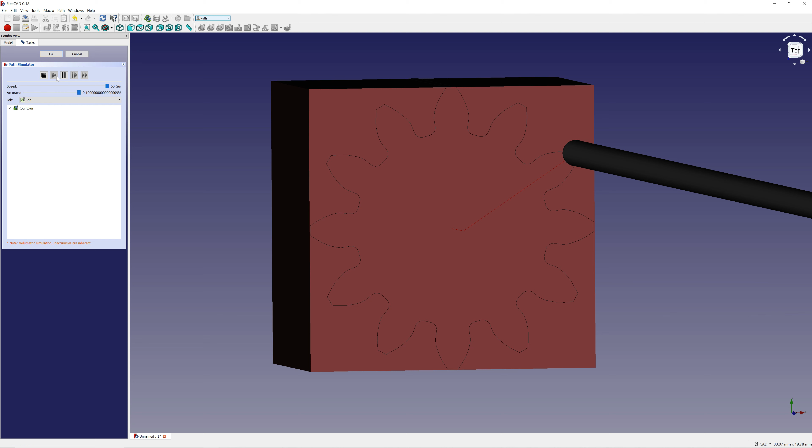Alright, so here's a review on how to do involute gears. With the million things I do at the same time, I keep forgetting how to do stuff on FreeCad. So here it is, just a quick review how to do involute gears, and this is basically what's gonna end up doing with step downs on the XY. Very boring. Also gonna do videos later with the robotics and a slitting saw on the 4th axis, but how about this for now?

So this is how I do it. Start fresh, discard. So file, new. We go parts design, with the motto create body, and then part design involute gear.

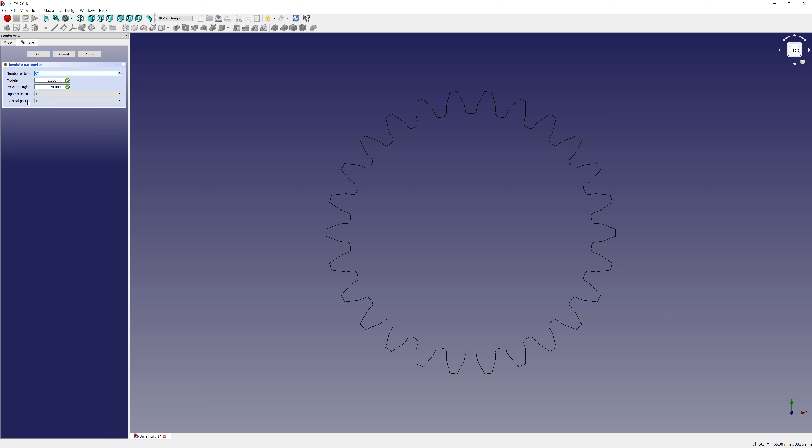I've been working my number of teeth. My gear has 12 teeth, with module 1 and pressure angle of 24. Okay, that's my gear. So let's speed this puppy up.

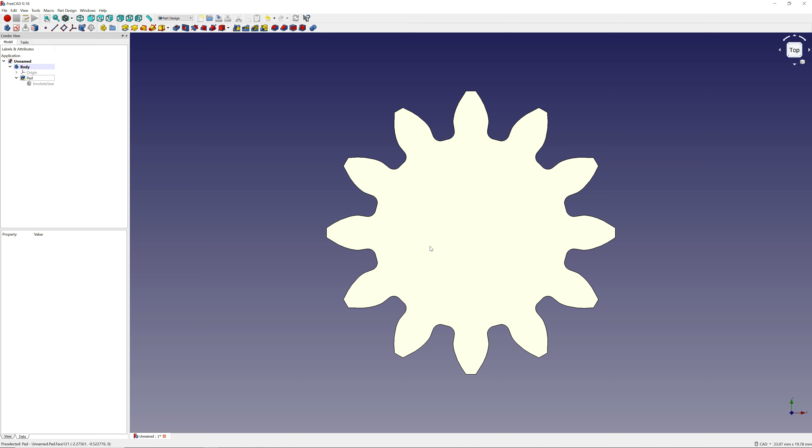10 millimeters. I work on the negative Z axis, so reversed 10. So now let me just make sure it looks good. It does. This is what I want. This, by the way, is for the Shasta pool cleaning system. It keeps breaking. I'm gonna do this out of plastic, and then if it works out, I'm gonna do it out of aluminum or bronze, depending what I have in my shop.

Path. So here, I guess you gotta click on this face. Start path. Not responding. On the body, so it's not on the face, it's on the body.

Let's go general, job, output, Linux CNC. This is some of the arguments I've been using. Precision equals 3 or 4. Let's do create cylinder. Already know that this is 7.02 with a height of 10 millimeters. I'll do all these other stuff here in just a second.

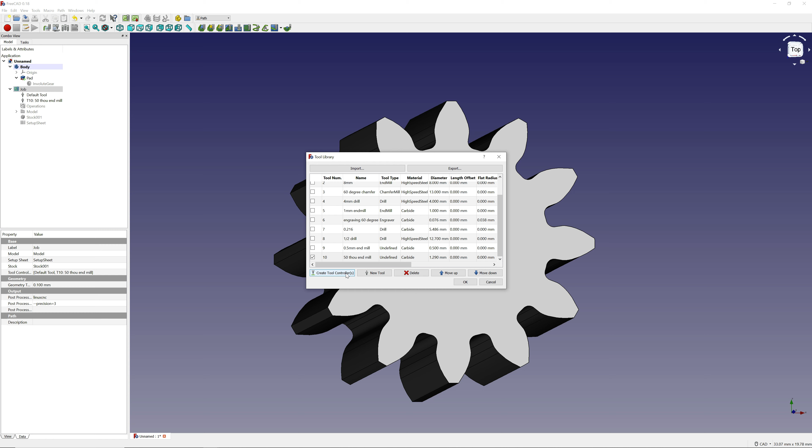So here's the job. Let's add the tool I've been working off. It's a half, or 50 thousandths of an inch endmill. Create tool. Okay, let's work on the tool.

30 millimeters a minute is about 1 inch per minute. 1650 is 100% of my VFD, and then I'll put 4200 on my Bridgeport. That looks good.

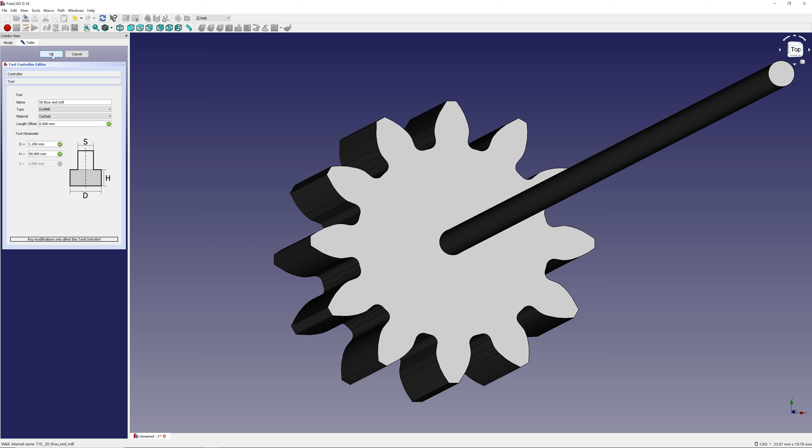And then I guess what I gotta do here is create the path around this puppy. Discard, discard, discard. I like to do start at 0. Final depth, like I said, I work on the negative Z, and step downs we'll do 2 millimeters.

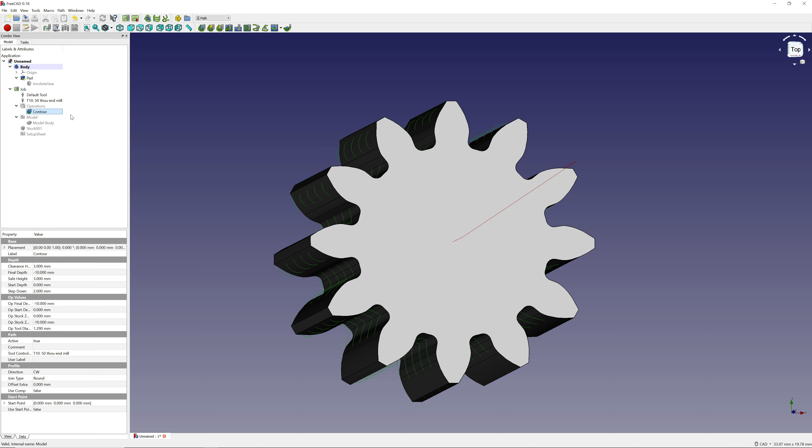I'm gonna go on export. Please first select now. Okay, yeah. Operation contour, that's what I'm exporting. Export. I've been doing it with this one.

So like I said, I've been working with this and Linux CNC because I've been getting good results. These are some of the arguments I've been using. If you want line numbers, it goes like this. If you want inches, it goes like this.

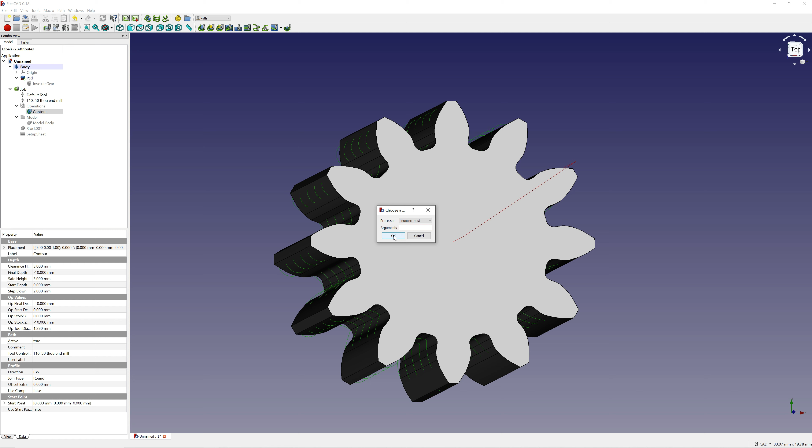And if you want 4 digits of precision, this is how you do it. I already did all those 3, and unfortunately I have to click OK, then override, and then OK, because commas and brackets and everything else I try is not working like several at once. So I'm sure I'm doing something wrong. FreeCAD is truly, I've been loving FreeCAD.

So this is it. XYZ, everything is in inches, and my F is about 1. Step downs, what I said about step down is going to be a little bit weird. So about 80 thousandths per pass.

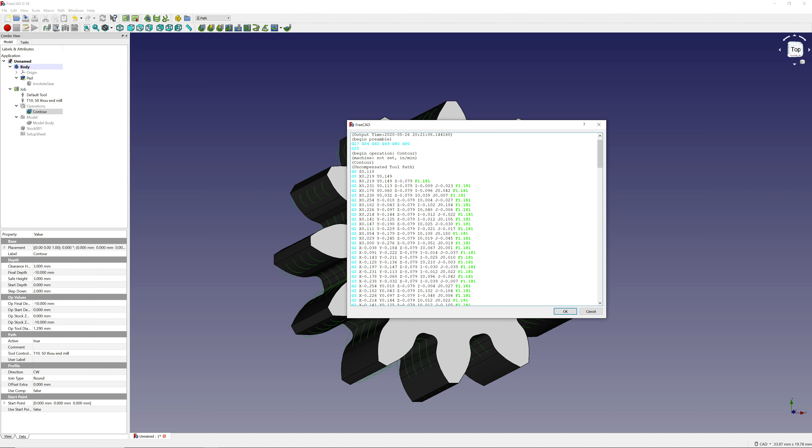And then I gotta finish, you know, I gotta do the beginning and the end. I usually do M5, M30, and up here I usually do my M3 and everything else. Alright, so this is it.

Good review for me, because I'm sure I'll forget it next time I have to do a gear again, and it's free archiving on YouTube, so win-win.